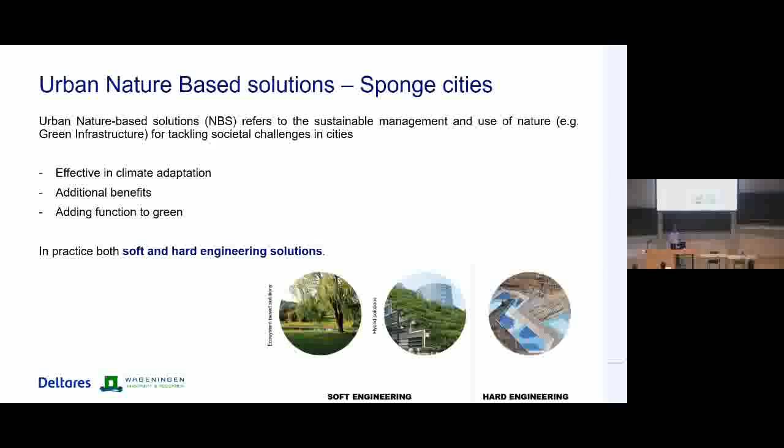So as I said, a lot of benefits of nature-based solutions. Well, we start in this session from the perspective of climate adaptation. So that's flood mitigation, drought impact reduction, and heat stress reduction. But we also look at the other benefits, which is about resource efficiency, improving the water quality, air quality, also the noise reduction, flood mitigation, improving the biodiversity, and also the aesthetics and health are very important.

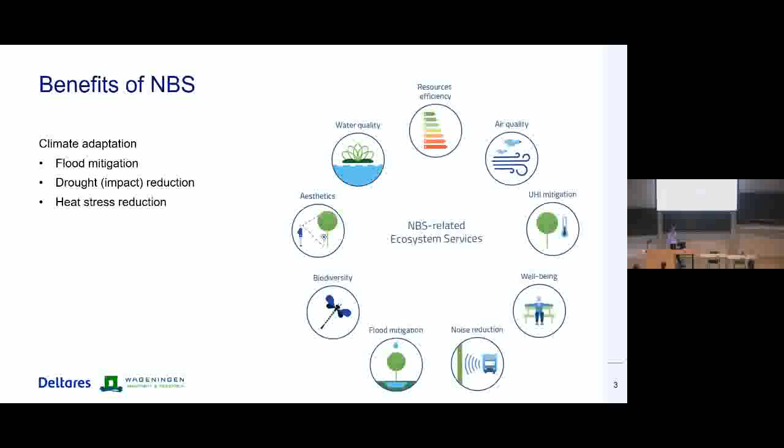Last year, we published an article about tools for nature-based solutions, but we also tried to identify the barriers for implementing these nature-based solutions in cities. And we identified 4 barriers. One is the level of expertise that is frequently lacking, and we interviewed multiple cities across Europe for this. There's a lack of know-how and competence in the cities to start applying these types of solutions, and also to scale up these types of solutions.

And then there's the institutional setting. Well, in the Netherlands, that is quite well arranged, fortunately, but in other countries, there's still a lot of institutional limitations for applying nature-based solutions. That can be, for example, for infiltration of stormwater into the subsurface, which is not allowed because it could result in groundwater contamination, like in Germany.

The availability of financial resources is an important one, and where do they come from? Traditionally, looking at stormwater management, they often have their own budget, but to invest in green solutions, that requires also the green department, and you would also like them to invest in these types of solutions. And because they have multiple benefits, which are often very important planning objectives of the city, improving the health, sustainable economic growth in cities, these budgets probably need to be combined. And how do you combine these?

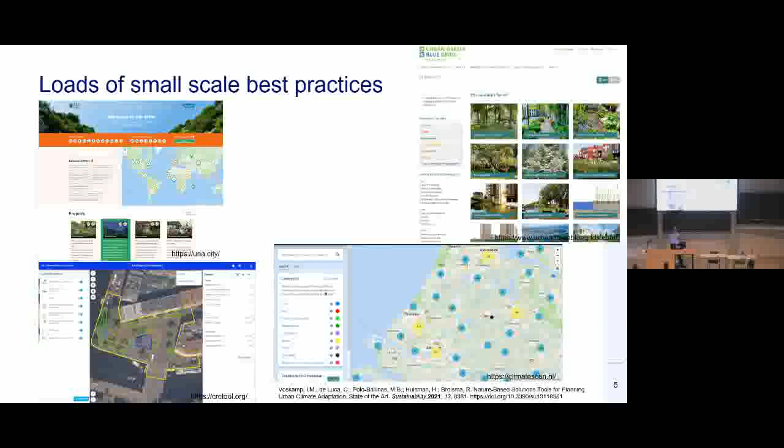And on the lower left, you see the CRC tool, that's a tool for planning of nature-based solutions. So a lot of small-scale best practices are already there. There are multiple tools, there are ways to access these websites, but how do we use these in practice, or how do we plan for nature-based solutions in practice? That is something that we would like to dive into in this session.

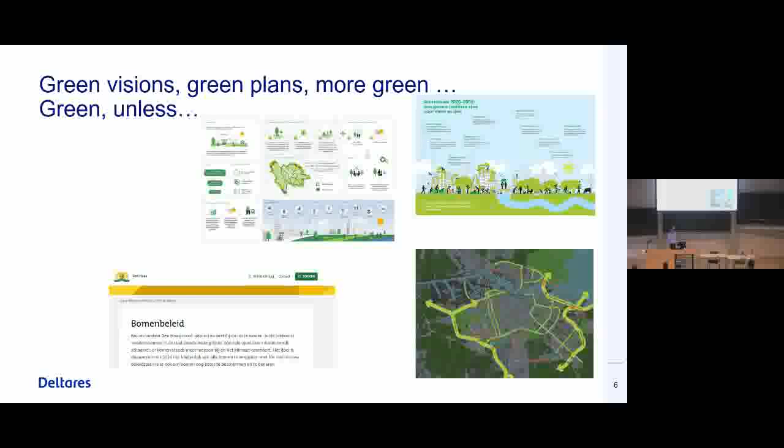And then on the other hand, cities, for example in the Netherlands, have a lot of ambitions. They have green visions, green plans, structure visions, and they are all about more green. Or as they say in Amsterdam and Utrecht, for example, we go for green solutions unless it is not possible. But then you have to explain why you do not apply these. But this is large scale, large ambitions, and we have a lot of small-scale solutions. And how do we bridge the gap? That is something that we would like to dive into in this session.

This was the introduction. Ilse will provide a vision for Arnhem for 2120, which is a very long-term vision, of course. And then Daniel Goedbloed will explain about Rainproof Amsterdam and how they work to a more climate resilient and also green city. Jeroen Kluck from the University of Applied Sciences of Amsterdam will also explain how climate adaptation can take place in cities, what types of solutions, and explain that it is not difficult to do so.

And finally, Rens Wijnakker of Fabrications will give an introduction of a really bottom-up approach of nature-based solutions based on his own experiences. And then in the end, we would like to have a discussion with the speakers, but also with you, on what your experiences are for implementing nature-based solutions and how we can work towards these large-scale visions. Ilse, shall I give the floor to you?

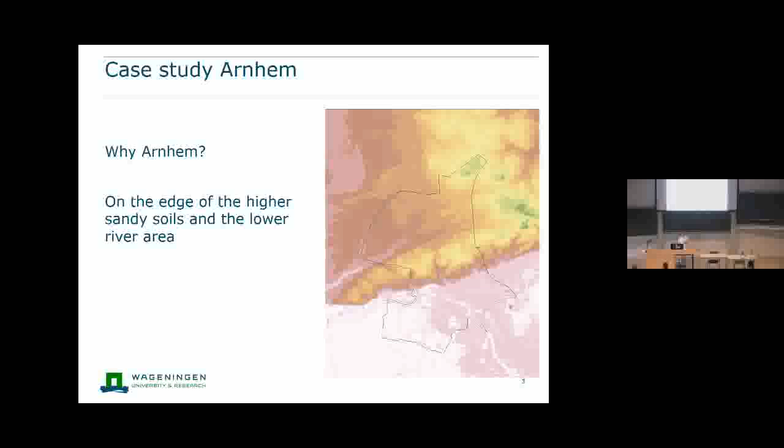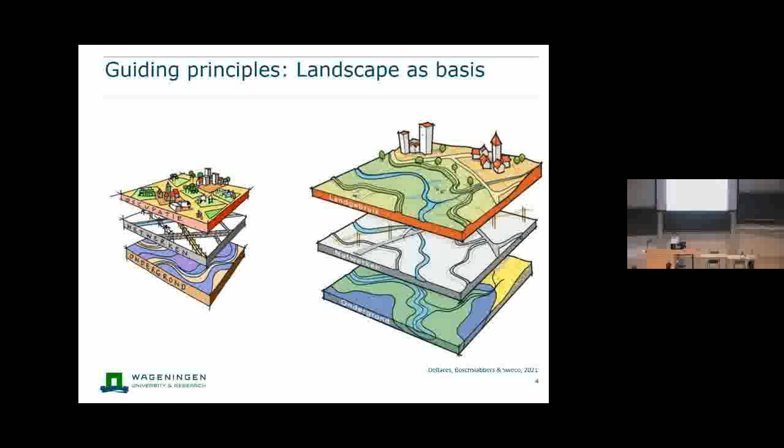And of course, we looked into what is going on in terms of scenario studies, trend analysis. What do we already know, or what do we think we know of what the future might look like? And of course, climate change is then one very important development to take along, to look into the scenarios that have been developed. But if you want to come up with a vision for a city, there are so many more domains you have to take into account.

But at the same time, we looked at what kind of ambitions are there, for example, for nature, where there are large ambitions for the river area, for the River Rhine, which is a part of this area of the city of Arnhem, but of course also to delta scenarios and to prognosis in terms of household sizes and the growth of the population. Well, besides this analysis, we also looked into the landscape itself. What does it have to offer?

As you can see, we did this study in Corona times. So we had atelier sessions where experts from all kinds of different fields came together, brought their knowledge from their domain. So for example, mobility, geomorphology, but also urban climate. They brought that baggage with them, but also they brought their maps, and we brought everybody together to see what kind of characteristics of the landscape surface we see as qualities, where we see room for improvement, but also where we see potential for solutions.

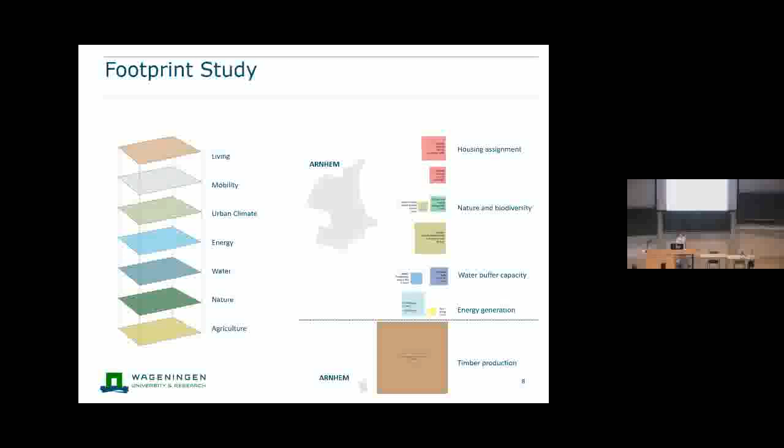On these flanks, you see that the built-up area is penetrated by green space, which is very important for the ventilation of the city. This is green space that accompanies the brooks that are already there, so that the downward wind that is already there naturally comes back into the city from the higher grounds.

And we say, well, the polders and the river area, in the future this should be one area in itself. The dikes will be removed there, and this is a dynamic area where there is living, agriculture, nature, transport, everything in this very vibrant landscape.

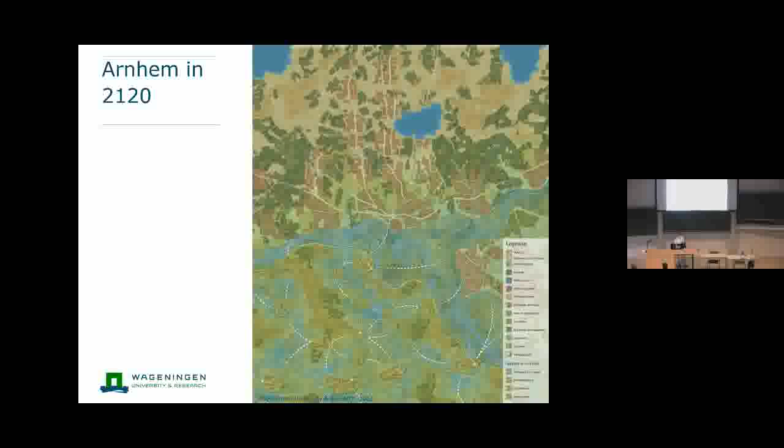Well, just to briefly give you an idea what this might look like, we say this might be the Veluwe in 2120. A very different area, no pine forest anymore, but a deciduous forest, living, energy generation, and more open grassland. So a very different kind of ecosystem where also nature and living and transport all come together.

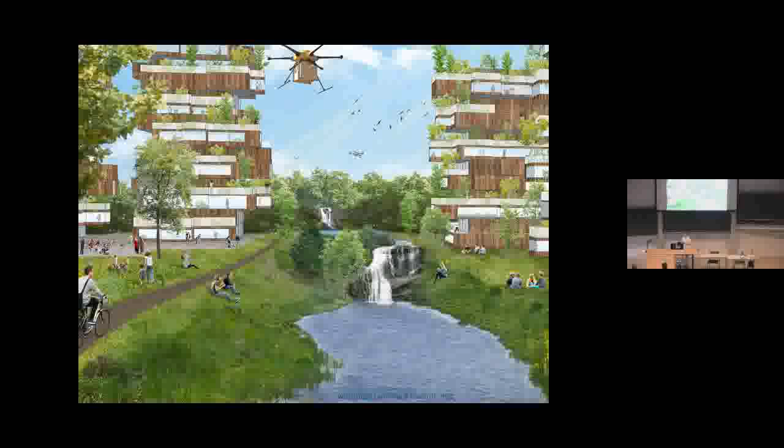If we think about the flanks, we see an almost un-Dutch kind of landscape where these brooks have got near waterfalls where there are nice cool spots to recreate. You see the drones that deliver the packages and the nice buildings from timber production.

And if we think about the river area, we see this layer approach that I showed, this multifunctionality, really comes back here. There is room for the water to expand when it is needed. There's room for biodiversity, for agriculture, and it makes use of all the potential that it has with changes over time.

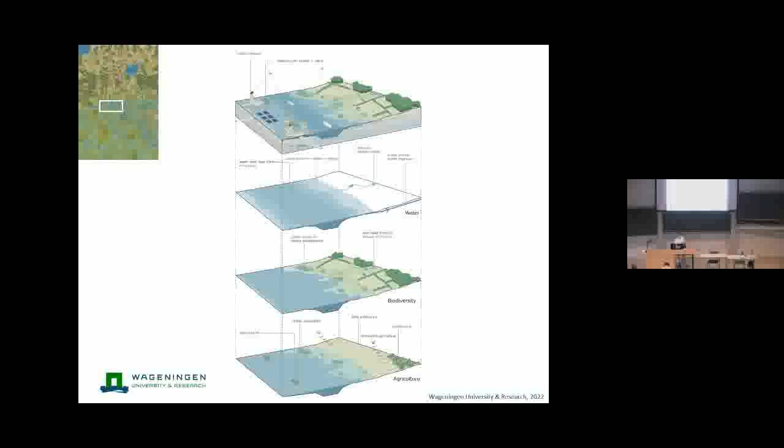So what I wanted to show you is this vision as some food for thought. This long-term vision, 100 years ahead, it's very far, but I hope to raise the question with you: how does looking ahead to our distant future actually influence the choices that we make today? Having this desirable image of our city in 2120, how will it help us to make smart decisions nowadays? Thank you.

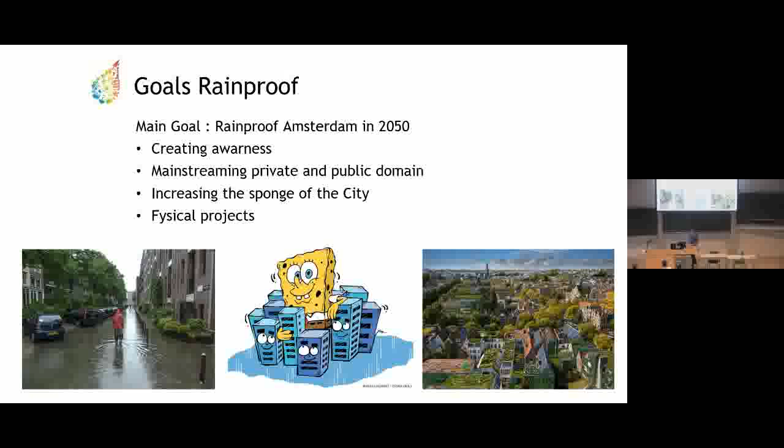We started with that, but we are now working on the complete climate adaptation themes, so also heat and drought as well. Creating awareness and trying to mainstream work in the private and the public space, increasing sponge in the city, but also of course creating cool spots.

I'm going to give a really short introduction on what this program is. It's a network organization connecting and facilitating a lot of stakeholders. And then I'm going to dive deeper into the nature-based solutions and how we approach these. But from this creating awareness, I just wanted to pinpoint that we're working a lot with all kinds of organizations inside of the city.

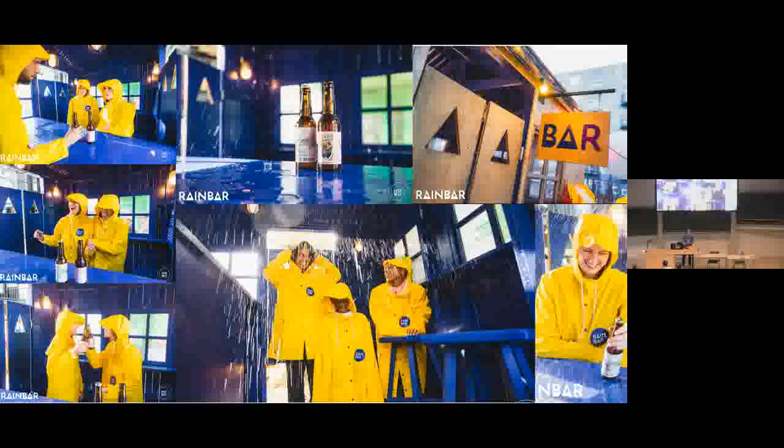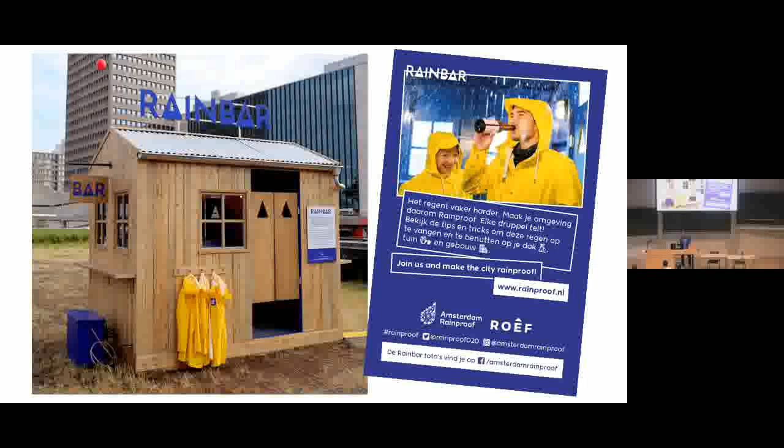And creating awareness is not just doing flyers, but really connecting to things which are happening in the city. So festivals, for instance, with a rain bar where it starts raining and you get wet, but when you get wet, you get a rain beer, which is made from rainwater, 2 for the price of 1. But this bartender is telling you the story, what you can do yourself to make the city more climate adaptive and what your role is in this. So this is more or less the fun part of our program.

Also, we started this initiative of having a competition of detiling gardens, and we're trying to count these tiles. The competition started between Amsterdam and Rotterdam, the city I worked for prior to Amsterdam, and is now actually national. Last year we got rid of more than 1 million tiles in all of the Netherlands.

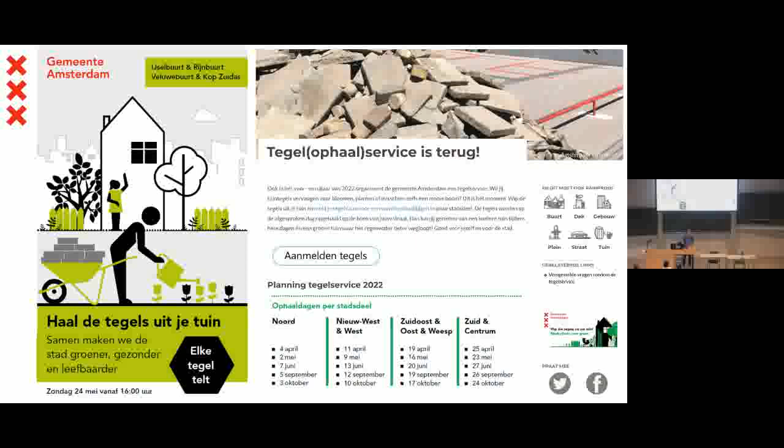And doing this, we're trying to facilitate a lot of people living in the city, to make it as easy as possible for them to get rid of the tiles. So the municipality has this detiling service which comes along every first Monday of the month in a certain area, and you're allowed to just put your tiles on the street, and then the municipality will take them along.

Another thing is that we see we are creating awareness, but people still have a lot of questions. Okay, what can I do in my own situation? How can I make my own garden climate adaptive? So we initiated rainproof coaches, 6 coaches in the south of Amsterdam, who, free of charge, will come along, see what your own personal situation is, and then give you advice. So this is what we do a lot of work with the vicinity.

But let's look at how we've been working with the municipality to get the whole city itself more rainproof, more biodiverse, and more resilient to heat stress. If you want to do that, you really have to get into the whole process the city normally does. So we influenced policy and guideline programs, we influenced key figures, and we also influenced the instruments which are there.

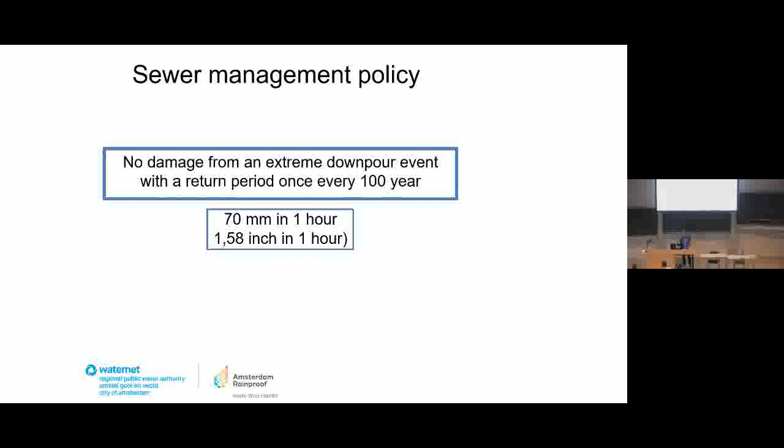One of the things we did is the sewer management policy, which now has this norm that we will have no damage in the city with a downpour event which repeats once every 100 years. And this means that in all of the projects the city does, in parks but also in streets, they have to meet this ambition. So in every project, this actually has to land. So what we did is we then looked at the city.

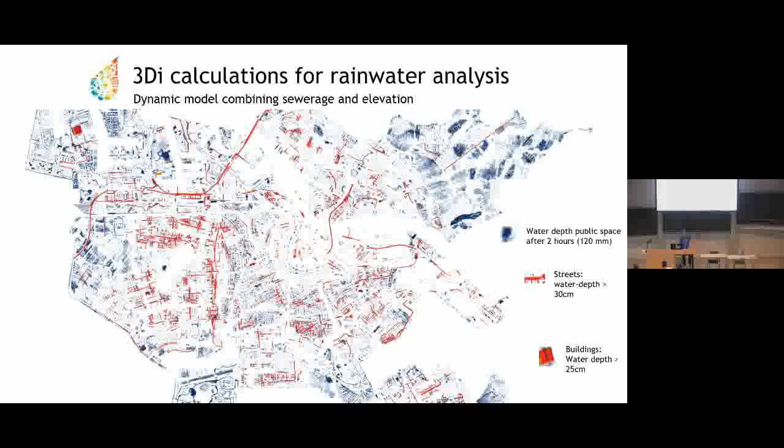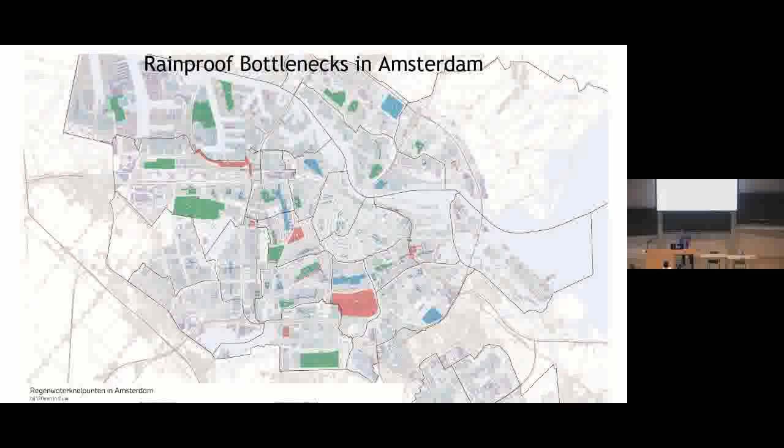And that's just speeding up the process. So what we're saying is that every time you're redoing a street, you're redoing anything in the city, you incorporate this into your work, and then you slowly and gradually grow to a climate adaptive city. But how actually are you going to do this in your projects itself? Because every time a project is done, people are going to ask us the question, okay, so what should I do here? And a project or a street is really connected to a whole system of streets.

So what we did is we identified catchment areas in which you should look at the solutions of capturing rainwater. So this is a normal catchment area, and we made these rainproof solutions maps. So in a workshop format, we got the project leader, a sewer manager, people with knowledge of green, all different kinds of people inside a room, to look at all kinds of map layers of the heavy downpour where there is a lot of rain collecting, but also the elevation in the city itself,

and then figuring out, okay, so if we want to rainproof this area, where do we see the possibilities to actually store water? Where do we see possibilities to discharge water to? And where do we want to spread water in the streets? And this really works quite well because this gives you a general idea, not really the complete solutions, but a general idea of what kind of solutions you need to look at in this city.

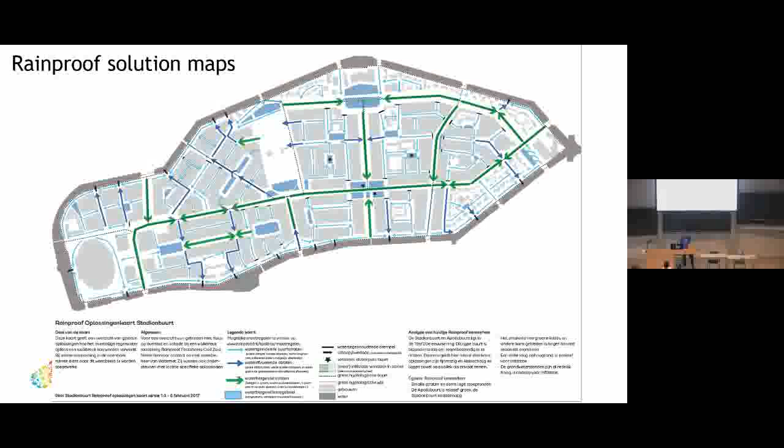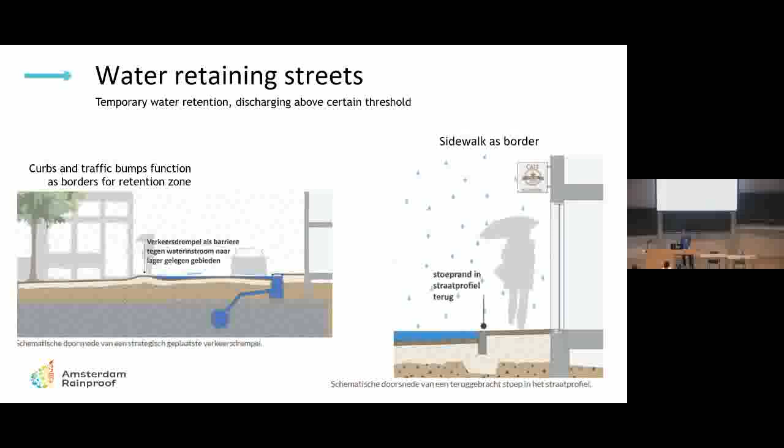And from this, people can then work in their planning of work being done. They can take this map and say, okay, so I should incorporate something like this, and now I'm working on this project, I should actually incorporate it and get it also calculated. So water retaining or water spreading streets, streets where you try to hold back the water in the street itself. And then if that's not possible, you want to discharge it somewhere else. So discharging streets. And then you have water storing streets. So this is more or less the principles we're working with in the city.

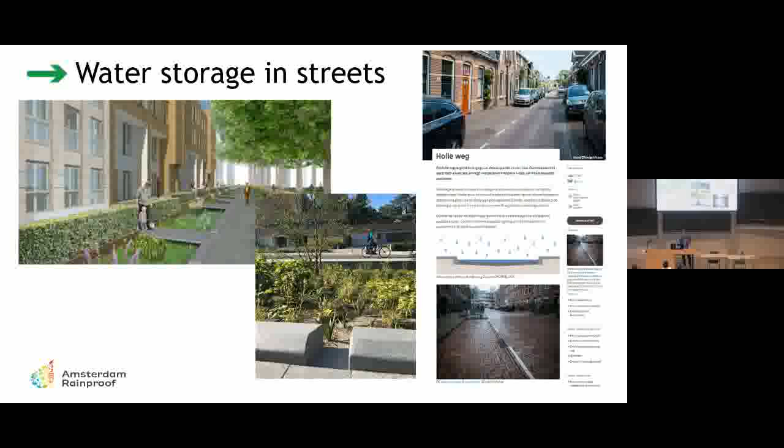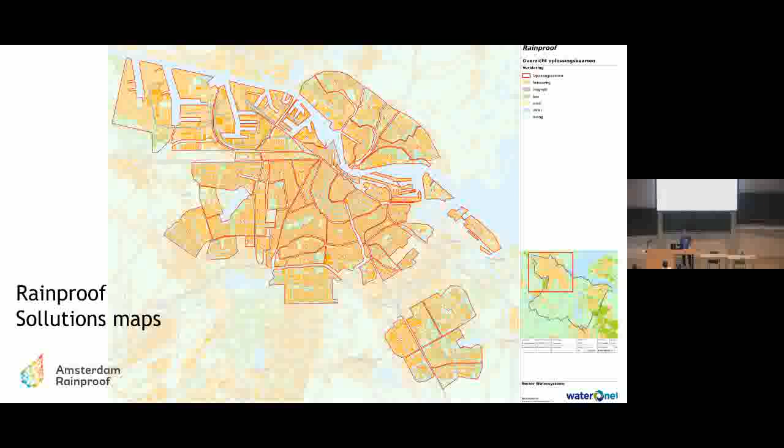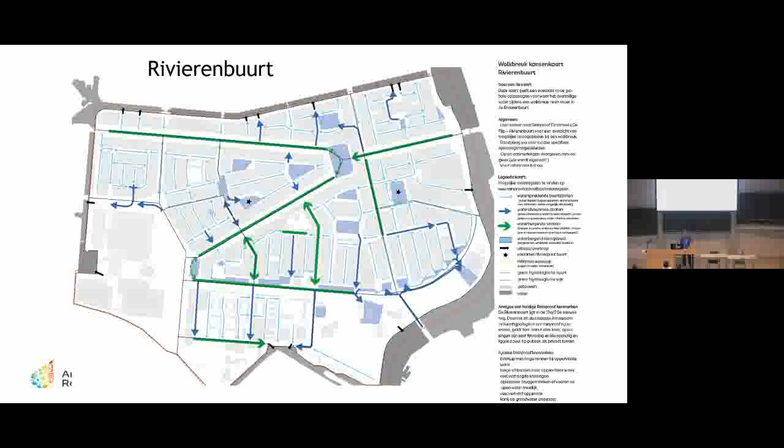And this seems to be working quite well because this really gets the programming in the city well along. And this is a map of all these kinds of solutions maps which have been made or still have to be made. But let's zoom into this river neighborhood because I have some projects which I want to show you where we're actually including nature-based solutions really in the city itself.

This, I would say, is not really nature-based, but it is really possible to infiltrate a lot of rainwater. So this is a pervious parking space, which normally would have been tiled. They detiled it and then put in this grinds. What's the name for grinds? Well, like stones, pebbles, a pebble structure, which is completely pervious.

What we also learned from this is that this is quite important. If we're introducing new kinds of solutions in the city, you see that the municipality, if they want to introduce this, they need it to be standardized. So you can do a pilot, but if you've done a pilot, you want to prove that the pilot works, and then from then on, you can upscale it.

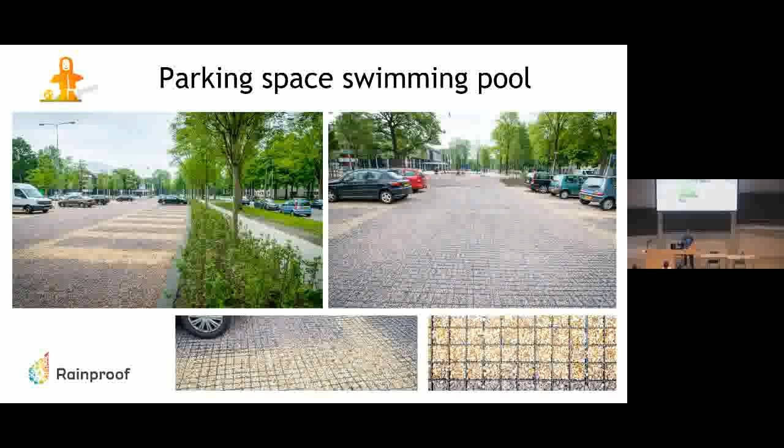So we did this, and we saw that this is not really a good solution because there are a lot of cars driving, the pebbles are being spread, and the plastic crates will be damaged after a few years. So lessons learned. For the next parking space, they just made the infiltration system right underneath the cars. So these are the kinds of developments we're seeing. Technically quite hard, of course.

And then this was one of the first SuDS, so really a wadi kind of construction where there was a lot of green in the Betondorp, which looks really great, but it's not really a paved area, so we have quite some space to really do this.

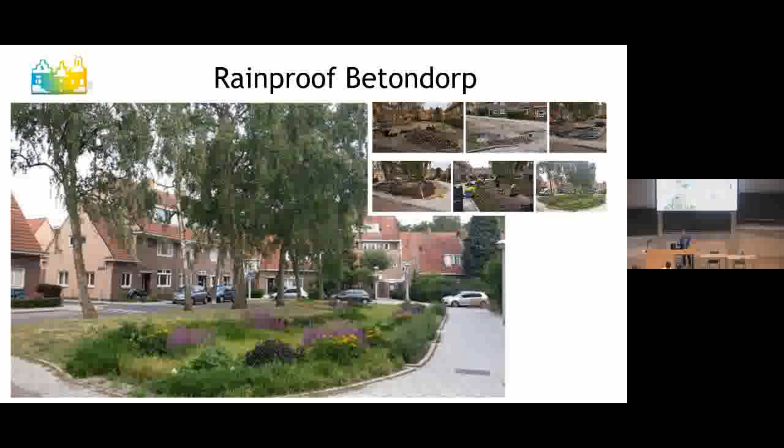It's been tested, so we've been testing how good the infiltration is. And then we have actually tried to copy this more into the more hardened surface and also try to see how it works when you really deepen it a little bit more. And then you see that you really need to strengthen the sides with these, well, how do you say, more constructed kinds of ways. And this is of course really, really expensive. So this is also something we will not see upscaled in a lot of situations.

What you want to do, of course, with these storing situations is retain the water quite long for the green to also grow in dry situations. So they made an open crate system underneath, which is closed off on the sides and underneath. So it's like small bathtubs, which can hold the water really long.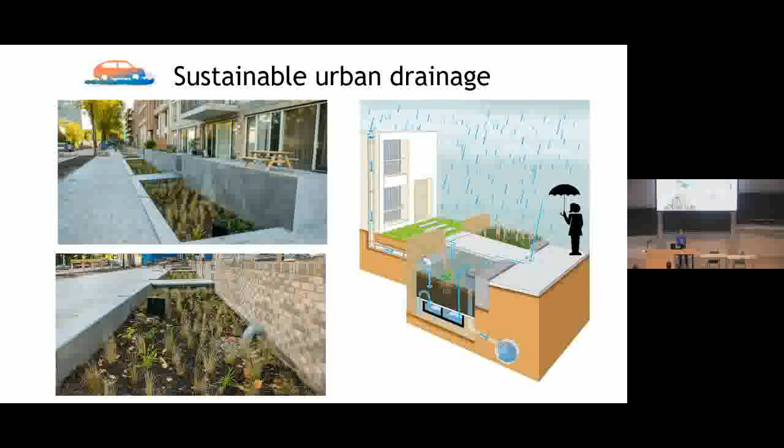The only problem was that these bathtubs were made quite technically with foil. And when we tested the whole system after a year, we saw that it actually leaked out of these bathtubs. And then you see that it's quite difficult to repair something like that because it's underground. We've planted on top of it, and then, well, how are you going to figure this out? So this is quite a technical solution which has a high chance of failure. So we're not implementing this anymore in that kind of way.

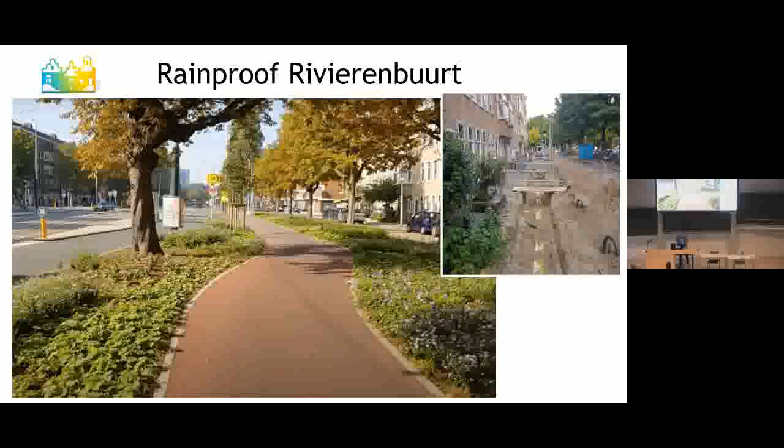Another one is just really greening, so depaving and really greening it in a biodiverse way, so that there is a lot of diversity in it. Here you see, these are SuDS, so the area is lowered, but not that much. It's possible to lower it, but we can't lower it too much because it's right next to the road. If you lower it too much, you would need these heavy constructions I showed just before. So we're trying to work with these normal standardized curbs. And all these kinds of things, we try to standardize. This is coming along, but it's taking some time.

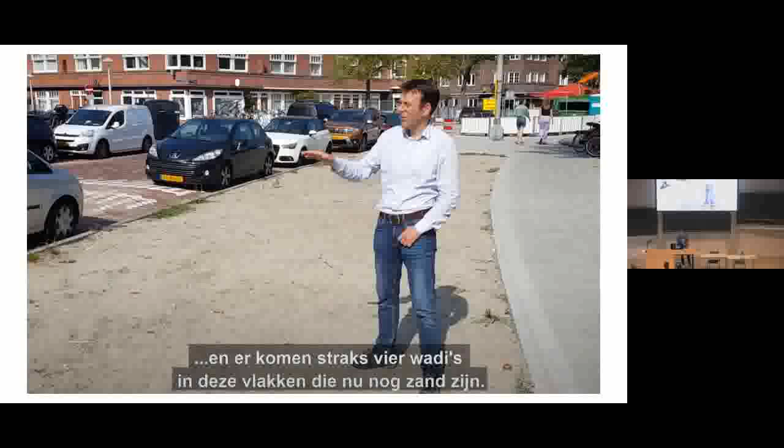Okay. This is how it looked before. When we redid it, it was completely sand; we took out the sand and then filled it. And this is how it looks now, which I think really looks nice. So we're really seeing a lot of areas which have been greened, but it's still hard to get this standardized. So we're looking at plants, but also at the smaller details which are in the handbook, the standardized design of the city.

So this is one with the hard sides, and I think this is more or less the last slide. One of the other things we're testing now, with Reinder in a project, which is also really hard, is green pavers. Inside the city, designers are not really fond of this. They're saying, well, this is the way we want the city to look, and how well do they work? How does maintenance work? So we have to test all of these things. How is the infiltration capacity? How long will it last?

So you see that to really upscale these kinds of things, we are busy testing a lot of them for several years before we can go along. This is one of the things which you could say is holding us back a bit. We're trying to get these green infrastructures, the nature-based solutions, implemented in all of the projects, but you really have to test them first before we can upscale them. And I understand this, because I wouldn't be fond of getting such a solution upscaled and then after 3 years discovering it's not really a good solution and having to take them all out. So we really have to test them thoroughly so we can upscale them. So that was my talk.

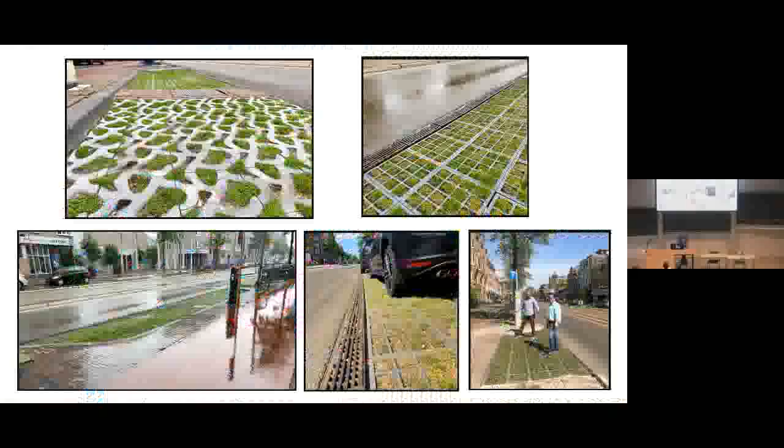Yeah, it's a once every 100-year event. So for a once every 100-year event, we're actually not really designing just the nature-based solutions in this. It's the complete design of the public space, which should be able to withstand a once every 100-year event without water flowing into the

buildings. And what we're testing is how the infiltration capacity, what should that be? But we don't have a standard that it should be a minimum of this. So we're really looking at how we can design or construct it in such a way that the infiltration capacity or the storage capacity is as high as possible. Yeah.

Yeah, no, it's true. It needs to be emptied in something like 24 hours, a little bit less. But the sewer system can discharge something like 20 millimeters of rain per hour constantly. So you'll have water in the streets for several hours, and then the sewer system is able to really discharge it all. And then the rest will actually be infiltrated in here.

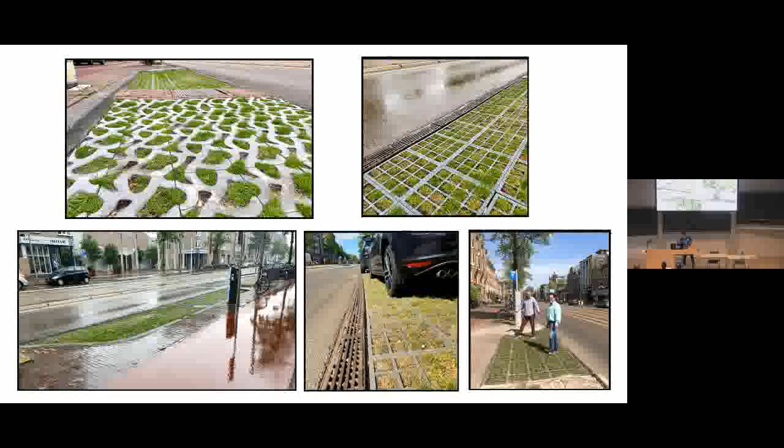And we're also looking at when you are going to get them actually working. So let me get back to this, for instance. Do you want the water to flow first into the nature-based solutions, or do you want it to first flow to the sewer system and then just overflow into the nature-based solutions? So it's also a thing which we have to figure out which is the best, and it differs in certain situations.

Thank you, Daniel. Yeah. I have to go to the next. More questions. Mm-hmm.

Yeah. Good afternoon, everybody. So my name is Jeroen Kluck. I'm professor at Amsterdam University of Applied Sciences, and I have a research group focusing on urban climate adaptation, so the effect of climate change on urban areas and how to deal with this. And most research we do is very practically oriented, helping many municipalities with what's effective in climate adaptation.

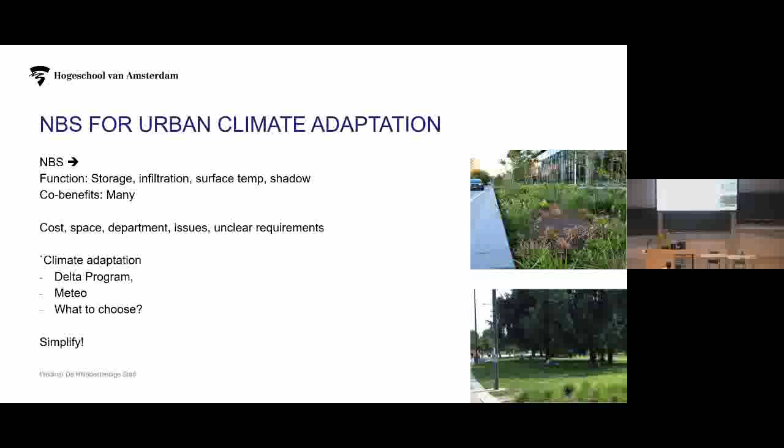I will tell you about some of the projects I've been doing on this. One is on urban flooding, and connects very well to what Daniel just told us. And the other is about urban heat. So we made a book of examples of how you can retrofit your urban residential area in a climate resilient way. And we started this project because we heard from many municipalities that they thought, okay, I know what to do, and I think it's possible, but my colleagues don't believe it, or I need to show it. And they say it's very expensive, but can you show us how expensive it is?

So we did about 10 different examples in about seven different types of urban areas. So we have, for example, high-rise garden city, low-rise garden city, historical area, or pre-war building block, which is this one.

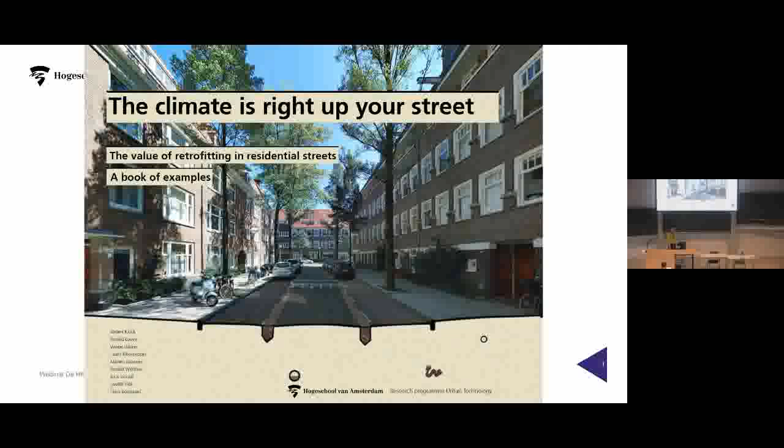All those different built-up areas, we made designs of a regular situation and retrofitting it just in the normal way or in some climate resilient ways. So this is an example of the pre-war building block in a flat area, in fact in Amsterdam.

And normally, if we would retrofit this and don't take into account too much heavy rainfall, it was before Daniel was working on 70 millimeters, we just didn't take into account a lot of rainfall. We said, okay, 20 millimeters is enough. Then you would expect flooding all over the street and maybe water in the houses. And then we said, okay, but very easily this can be solved just by lowering the street level. So you provide storage for the water during extreme rain event, in the same line as Daniel just explained.

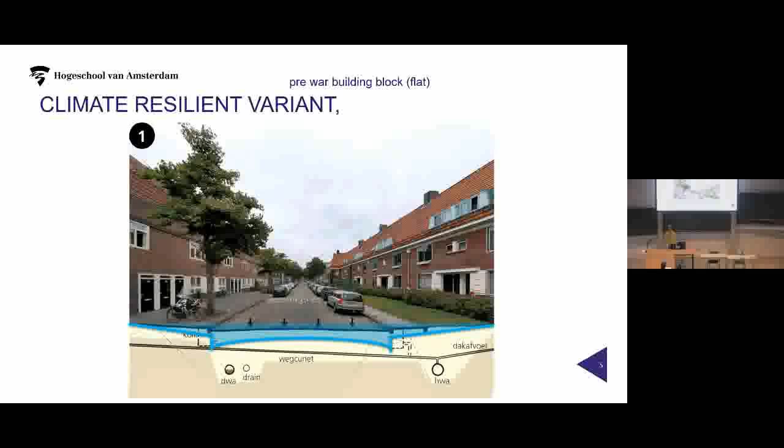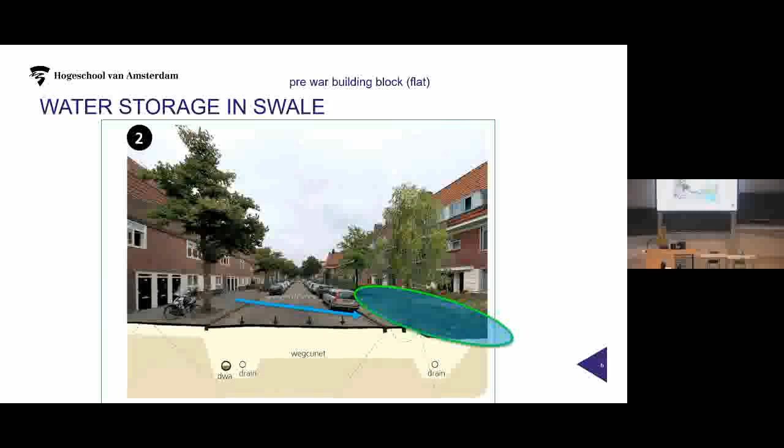This is climate resilient, but it's not really a nature-based solution. But some of the solutions can very well be done also with a swale. So you can lower the green area at the side of the road, and you can store water there temporarily or have it infiltrating there. These are two of the solutions.

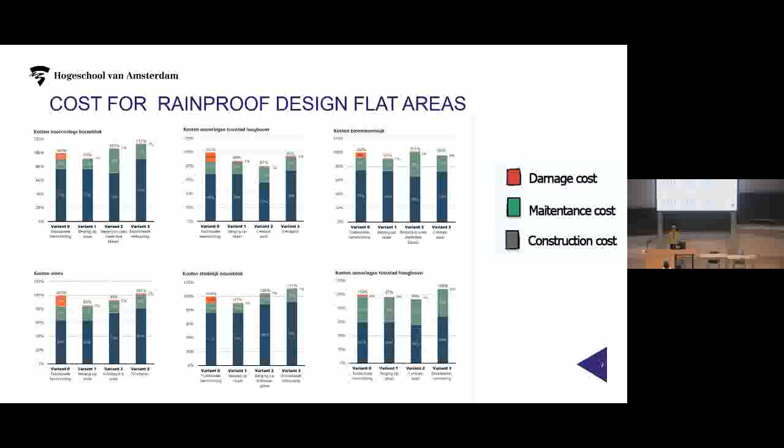And for all of those solutions, we did an analysis of the cost, the damage cost, the maintenance cost, and construction cost. The damage cost is, of course, how much damage does a rainfall event give, and we took into account how often it occurs. So we got estimates for a number, and I'll show you one of them, which is the pre-war building block again. And so the most left, variant 0, is traditional redesign, and of course, that's not climate proof.

And that was before we started thinking of this, or how should we do it. But then the other three, they all are more climate resilient. You see the red bar is gone, or almost gone. There will always be some possibility of some damage. But the total cost is lower or not much higher than in the traditional redesign.

And the first variant was the one with lowering the street, but the second variant was with the swale. And so just for a little bit more money, you have a green area and you have climate resilient design. What else should I say from this one? The only thing is, of course, that more money will be needed for maintaining the green instead of maintaining the sewer and the street. So possibly there should be some money going from the sewer department towards the green department.

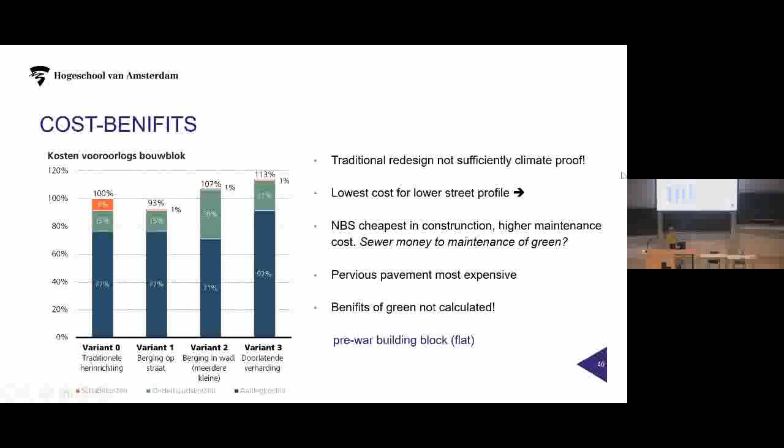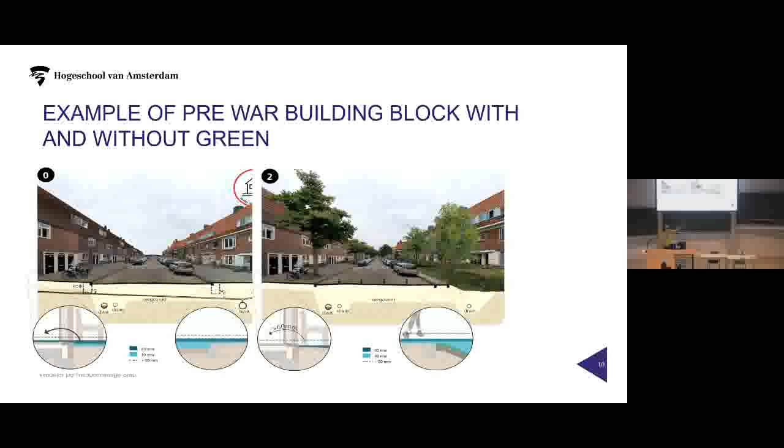I find it very easy, but I know that in the municipality this can be very difficult. Okay, this was very short because I don't have too much time, but climate adaptation can be done for the same cost. And we showed it for several locations. And we also looked into the additional benefits of green. So we took the same street and also several others. First, we removed all the green on the left-hand side. And on the right-hand side, we placed something back and maybe something extra. And then we compared those situations.

And we did a cost-benefit analysis of the situation with the tool in the Netherlands, which is TEEBstad, the economics of ecosystems and biodiversity. And we looked through all the possibilities. It was health, energy, real estate, and so on. And we thought only the first, the third, and the sixth were sufficiently sound to be analyzed. So if we can analyze those, we already have a good answer. So about health, people in a greener area go less to the doctors, and so they can work more often, happier, and in fact, less visiting doctors is already a huge amount of money.

And the other one is the real estate. Houses in the vicinity of green have a higher value. And we didn't take this higher value directly into account, but we took the amount of money you have to pay to the government for having a house with a higher value. So it's the taxes you pay extra, so this money is going really to the municipality or to the national government. And then the final one was water management, because we were working for the water managers and they were very interested in this. And they were a bit disappointed because the blue part was very small.

You see here. But what we see is that the benefit of greening versus the cost of the reconstruction of the whole street, climate proofing the street, was all the time quite high.

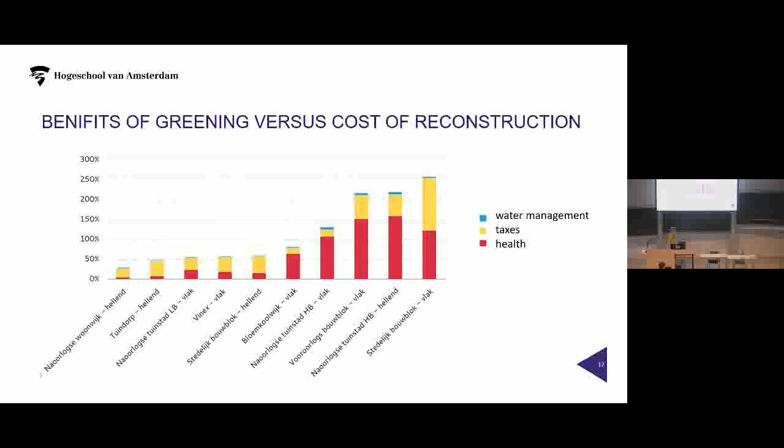But more importantly, if you look at the benefits of the greening versus the cost for the greening, and the 100% is the cost for the greening, then all the solutions were cost efficient. The only problem is there's nobody really paying for this extra green, and the municipality always thinks, okay, the more green I have, the more money I need to spend, and there's no income for this.

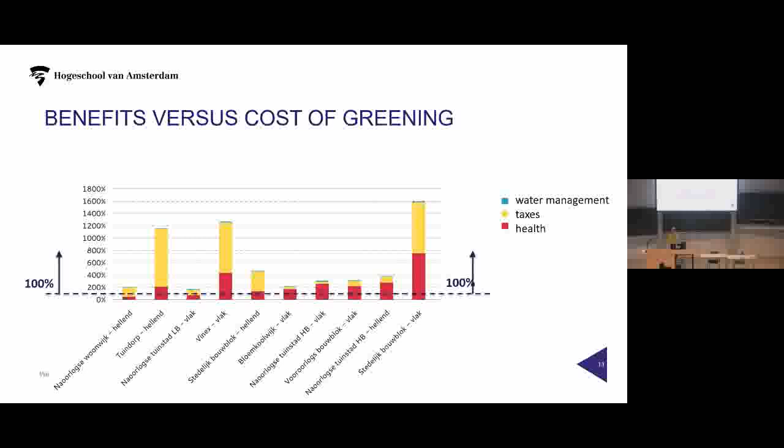Okay, this is one of the problems, of course. I think you knew it, but we really thought about those examples and we showed that this could be the case. Okay. So this can be done in a climate-resilient way for the same cost, and there are additional benefits from the greening.

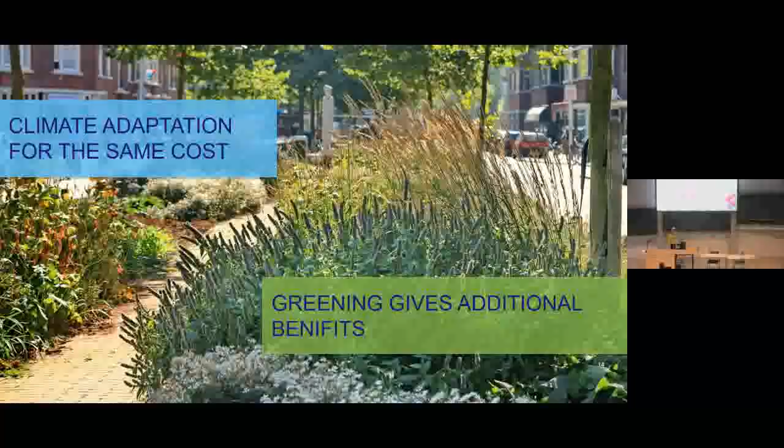Then the other thing I wanted to show you is about heat stress. Heat stress is even more difficult to decide what to do than stormwater flooding, because with stormwater flooding, you can think, okay, once in so many years I expect 50 millimeters, 60 millimeters, 70 millimeters, and people are discussing about this. How many millimeters should it be? But in the end, you can decide, okay, so many millimeters, and I want to have no flooding once in so many years. But what about heat stress? There's no real goal what we should prevent.

In fact, heat stress in cities gives many deaths a year. For example, in the Netherlands, we have 250 deaths a year because of heat stress. And even if you do everything possible, people will still die because of heat stress. So, what do we choose? And also, how do we analyze it? It's about the surface temperature, the air temperature, the physiological temperature. So there were quite some questions. And of course, finally, what is most effective?

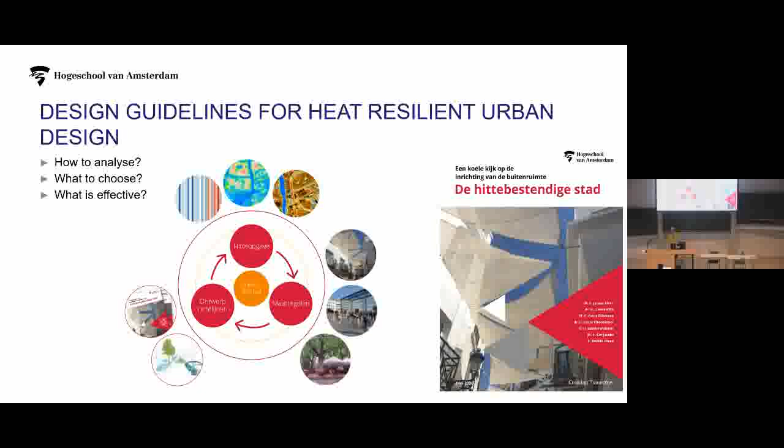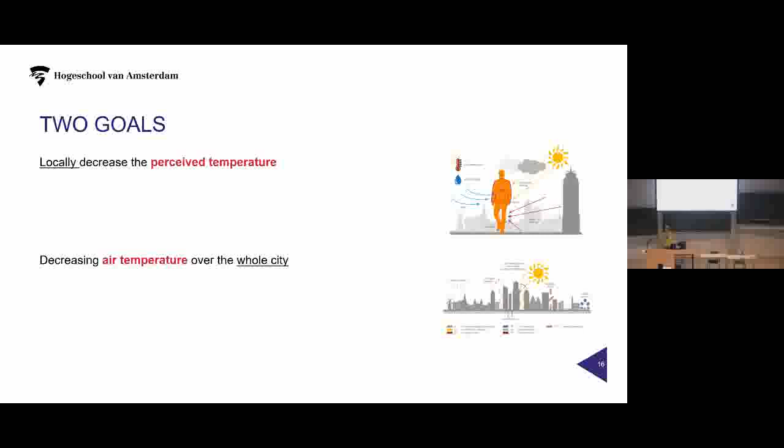So we did a study, and finally we came up with two goals. One is you need to decrease the locally perceived temperature, so the physiological equivalent temperature. So if you go outside, it should not be too hot. And the other thing is the air temperature should be decreased, because the air temperature is related to health. And lower air temperatures make the night also cooler, and in general people can sleep better and have less health problems.

So for those goals, we made three guidelines. One is every house should be within 300 meters of a cool spot. And this guideline, we came up with together with some of the municipalities, was really a choice because we could not say, okay, this threshold in temperature should be sufficient, no more than once a year this temperature or something. It was too difficult. So we turned it around and made it a positive thing. We say, how can you improve the city with the guidelines for heat stress? So we came up with many cool spots in the city. And the other one is, if you go outside, there should be sufficient shadow in the urban area.

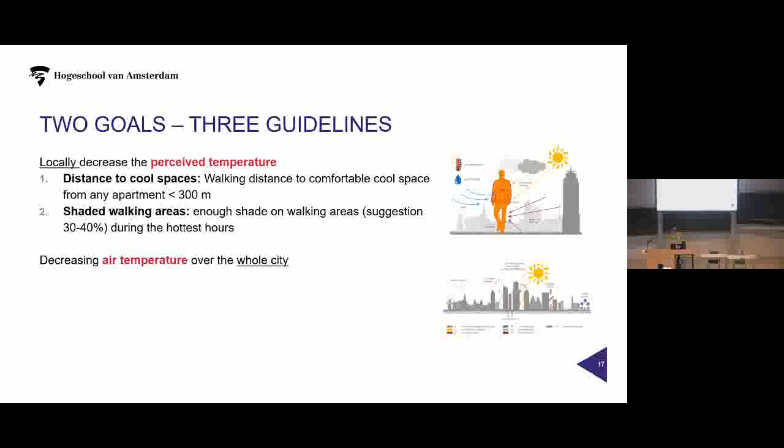And why 300 meters? There was some kind of rule that every house should be within 300 meters of a park, so we could connect to this. And why 30 to 40% of shadow on the pedestrian areas? We have been looking at different photos together with a panel, and we chose, okay, 50% might be too much, 20 too little, okay, 30 to 40. So science, eh? But municipalities are now picking up those rules and hoping to improve the city in a climate resilient way.

In the air temperature part, we thought the more green, the better. And Wageningen University came up with a rule of thumb that 10 percentage points more green in the city gives half a degree reduction of the average air temperature. So this should be the direction to choose, but it's very hard to say what's enough. Therefore we looked at all the actual percentages of green in cities, and we said, at least each city should be above the average for its typology, but we promoted it should be above the average plus a standard deviation. So standard deviation, some science in it.

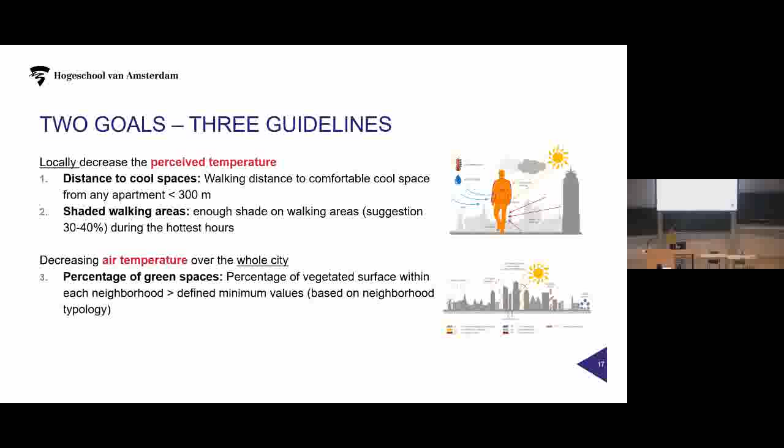And something more about this distance to cool spots, also called the flip-flop distances. So if you are old and wearing flip-flops, on a hot day you can walk to the cool spot. And we said at least 200 square meters of a perceived temperature lower than 35 degrees. 35 degrees because this was based on a study in Germany saying, below 35 degrees PET, not air temperature but PET, it's still somewhat acceptable, and above it, it will be terrible.

This looks very technical, but in fact, as soon as you're in the shadow, it's okay. So in fact, we're promoting shady places. And in my opinion, it doesn't have to be 200 square meters. It should be a design of a square or a small place in the city where people can go to during a hot day and relax. And there might be some water, some benches, maybe some grass to sit in.

But it should also be designed in such a way that in the rest of the year, because many times in the year we don't have so much sun, you can lay in the sun or sit on a bench in the sun. So it's combining a guide for heat stress and a guide for improving the city. And this map, which is available for all of the Netherlands on the Klimaateffectatlas, you can see in red houses which are too far away from a cool spot.

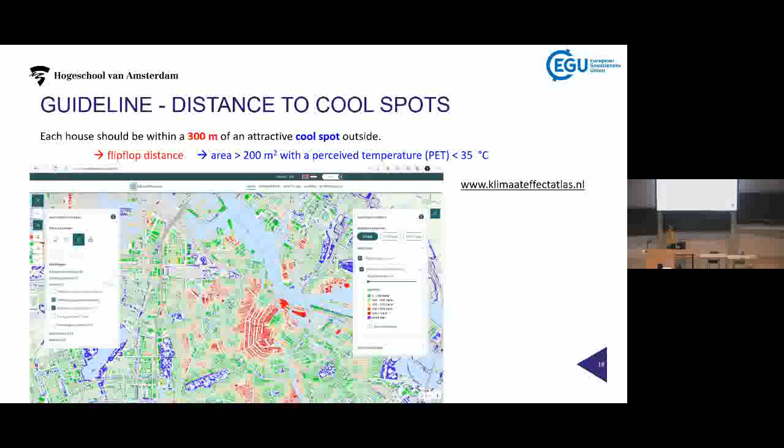So these were some guidelines we came up with the municipalities, what's essential and what is the bonus. So it should really be an attractive place to be. So, and then I can conclude. So the climate adaptation, I think we need nature-based solutions in climate adaptation. They are effective, possible, and they have many co-benefits.

And I think if you want to make this work, we should link the greening and the climate adaptation together, because there is even some agreement in the Netherlands that we will do the climate adaptation. And there's many reasons to do the greening. So I think if you put them together, it will work out. And the other two I've said already. So that's it.

Thank you for doing this presentation and trying to make it simple for cities to come up with climate adaptation options and also for greening. Any questions? No questions for now? Joseph.

Yeah, I was wondering, when you calculate the cost benefits, what kind of timeline did you have in mind? Yes. I can't say anymore if it's 100 years or 60 years, something like this. So a time period in which you have to reconstruct it several times. So things which stay for a long time and things which have to be reconstructed several times are leveled out in this way.

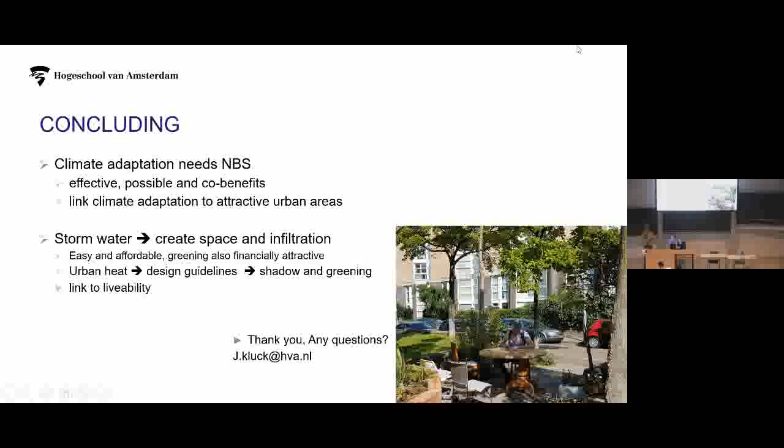Continue to the next presentation because we're behind the schedule. No, that's I think all our fault. I'll put this in my pocket. Where is the thing? Here. All right. So, yeah, I was just asking, you're still okay, but I can see you're still awake.

Good. My name is Rens Wijnakkers. I'm a landscape architect, and this is what I do for my work. And as you can see, it's not that different from what was presented this morning by Tim van Hattem. We work a lot for mainly national governments, evaluating all different kinds of spatial scenarios for the Netherlands, how they relate to each other and what it means for our environment.

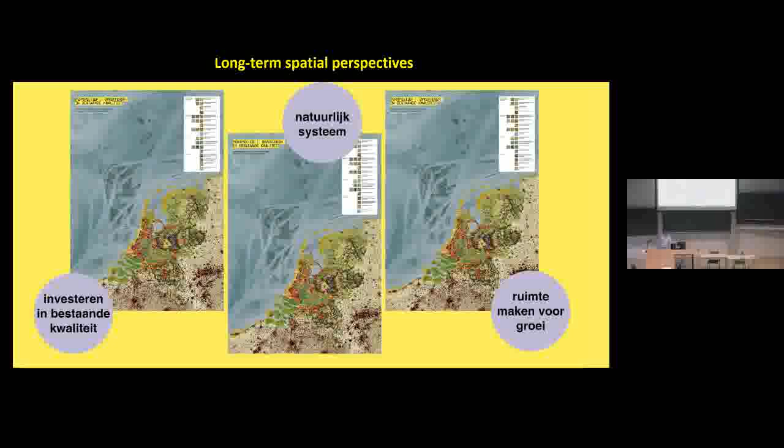Drawing nice maps with that, and I could talk about this to you for hours, but I don't have hours, so I'm not going to talk about this today, unfortunately. Here you can see a small zoom. I love to show this kind of map, how the differences take place. But today I'm going to talk about something more personal, about where I live in Hilversum, on a fringe between high and low, just like Arnhem, not that spectacular.

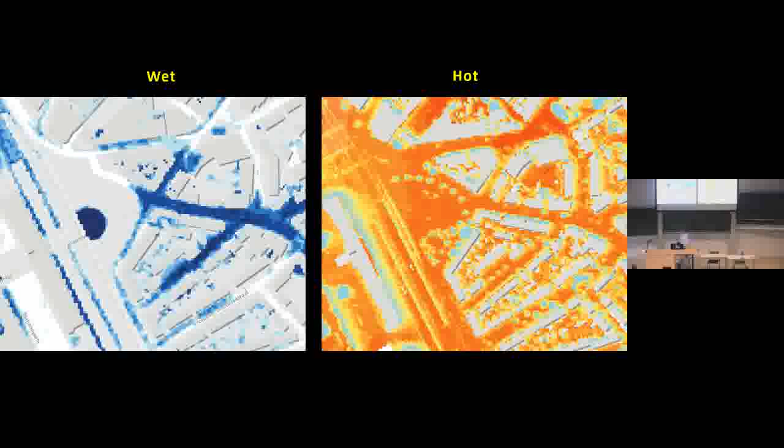So I joined this citizen initiative called the Groene Loper, the Green Walkway. And it's a small group of people. We are around 8 people, but we take all kinds of initiatives, and we are backed by the municipality for this, because it was an outcome of a neighborhood agenda, so a process of improving our neighborhood.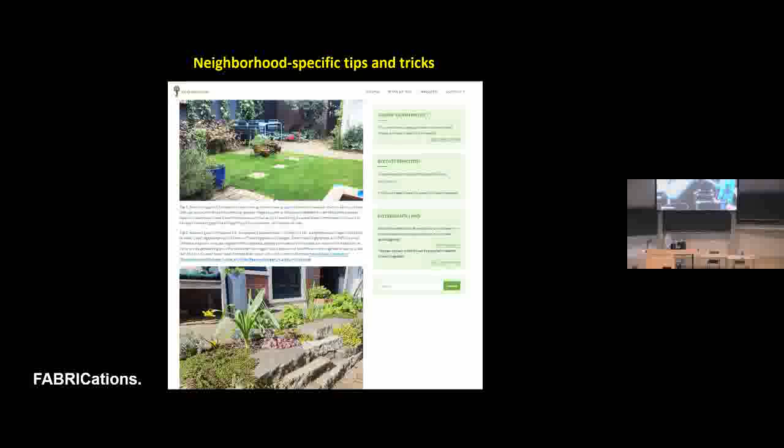So what we try to do is collect ideas from people that live in our neighborhood. So we stand on markets and on presentations like this, but then not academic, but for the people that live near us. And also we have a website where we share advice. We have some very specific circumstances in our neighborhood, like small gardens, but also, for instance, people have their own waste containers, which cost around 3 square meters of their garden. Well, no more place for some green, so we advise about that. And we try to help the people that live in our neighborhood through every skill.

So one of the actions that we did, funded by the municipality, was giving away regentonnen, rain barrels. One of the challenges was actually connecting these rain barrels, because many people were willing to bring those. And then after that, you saw in a neighborhood app, can someone help me to connect this barrel? I don't know how or where to buy this stuff.

And what we also do, we walk around with people from the municipality, from the maintenance department, and we just have a look where there are opportunities to do micro scale improvements. There's improving the position of trees, trying to make things just slightly bigger. It's just a few square meters, but if you do it in many places, it works.

What you can see here, and this is one of the challenges in our neighborhood, is that the municipality is very hesitant to do actions below surface, and that is because it used to be a very industrial neighborhood. There's a lot of pollution here. There were many factories, amongst them one just behind the houses that you see, which was an ink factory.

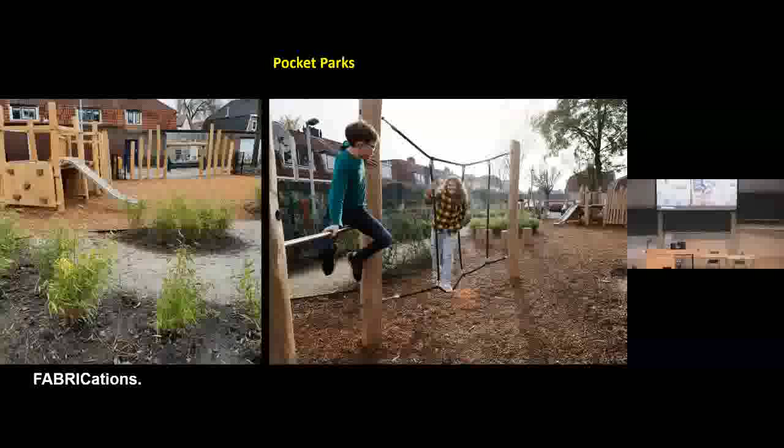Pollution goes deep, till 50 or 100 meters deep, but it's also very close to the surface. So many of the ideas that we have, they have to be done on top of the current surface, which is a pity from a climate adaptation perspective. Anyway, we are still doing many nice things. So making these small pocket parks, also with the neighbors. We really have to look for areas, you can see here behind the houses.

Also, as a landscape architect, I do design proposals for the municipality, showing them with what kind of measures you can increase the amount of green. This was the parking place that you just saw in front of our house, which was flooded.

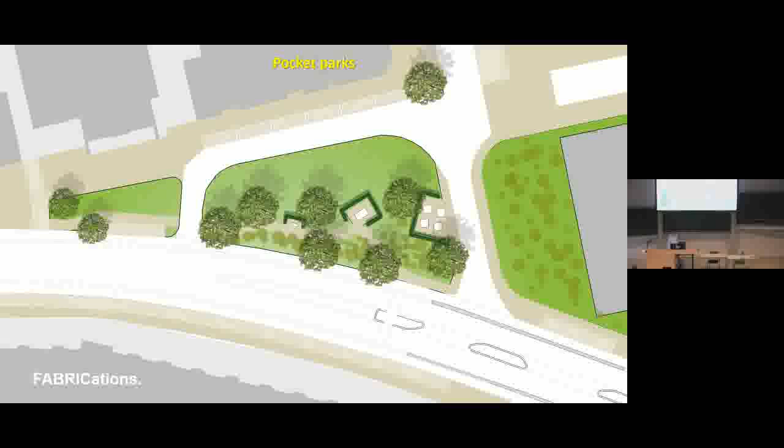And what we also do is, there are many urban developments taking place, and we literally get the ruler and measure if these urban developments meet the requirements that are in the neighborhood zoning plan. They always try to scoop off some green and make some extra square meters of buildings; well, we try to scoop off some square meters of buildings and make some extra green.

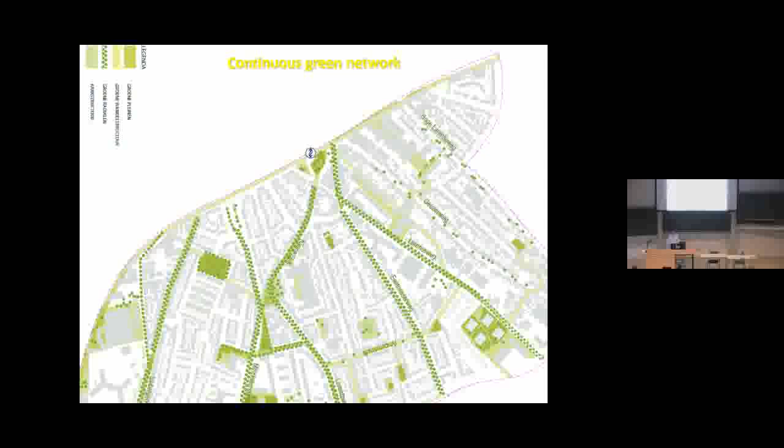And because these numbers are in this neighborhood agenda, these requirements for amount of green, we can really point out where it goes wrong. And what we are trying to achieve is a continuous green network in our neighborhood, which is nice for people, but also for animals and plants, and hopefully for water storage.

I want to talk a little bit about what are the success factors of our group. Where I live is a working class neighborhood, and many people are not necessarily happy when a parking place goes out and some green comes instead. So what we are really keen on is that our group consists of all the new and old citizens. And new, I mean imports from Amsterdam, because that's what it mostly is in Hilversum. And old are the people that really used to work at these factories, that live here already since birth.

We have a group of people that's willing to invest a lot of time, and it is disappointing that it costs so much time as a citizen to voluntarily improve your neighborhood, but it costs like hours per week. And we have a very open attitude to the municipality. We try not to fight them. That's very helpful. And what also helps is that we have a very accessible project manager. His name is Gijs. I could call him now and show what I'm doing here.

What I already talked about is a policy-backed agenda and budget for making the neighborhood greener, which makes it much easier to execute initiatives like these rain barrels. And I personally, and also other people in this group, have experience with governance, with politicians, with talking to people like aldermen or directors in the municipality, which makes it easier. But if you don't have all these factors, it's very hard to really achieve something.

Yeah. I wish I could, but then that takes a bit too long. Yeah. In the different neighborhoods, local networks were facilitating it. So I think that this would require action from... Yeah.

Yeah, and what you see is, as I said, we have a very good project manager, but he is a project manager. He doesn't know anything about the content, let's say. So what he basically does is, if we come up with some kind of proposal for a green structure, the first thing he starts to do is split it up in different small projects, because that's something he can manage. And then we do the projects one by one, but most of the time you can do only one of the projects that you need to have in this integrated development.

Okay, thank you. Yeah. I think this one, because this microphone makes a little bit less noise.

I think this was already a nice start of a discussion for which I want to invite all of you, actually, because I think we heard some nice stories about success factors, but also about challenges when we implement nature-based solutions. So, starting off with this very long-term perspective that I sketched, like if we think about this maybe ideal nature-based city, what might it look like? Going towards the Amsterdam perspective, where things are actually already happening now, but where there is already also a vision, like how to implement this in the near future and how to focus on these crucial areas and to take this rainproof approach on board in upcoming projects.